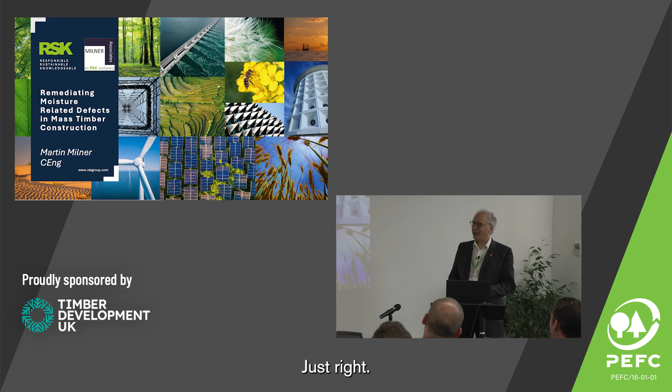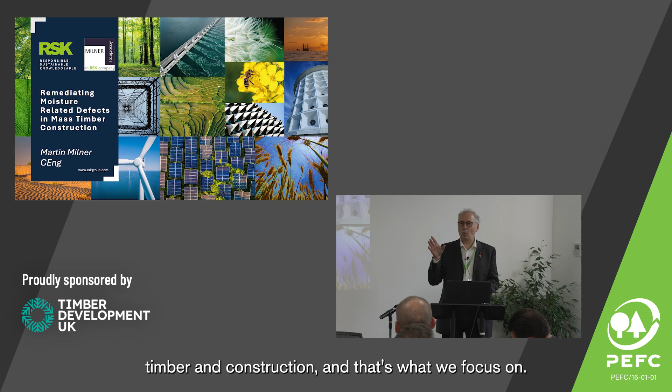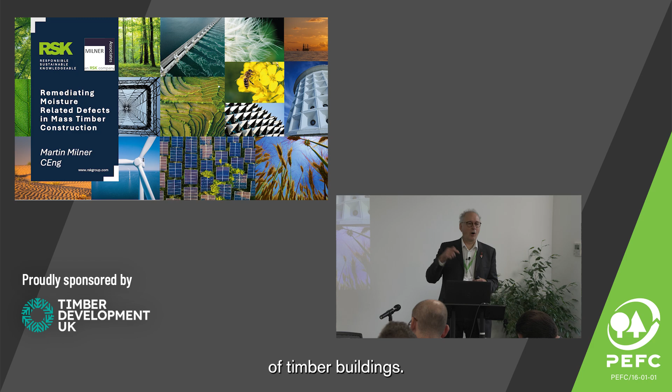Now, Milner Associates are part of the RSK Group, which is a large global environmental, soil and water consultancy, and I'm limited. Now, I mean that in the most modern sense. Sometimes they call it competence, but I like to go back to the old meaning of limited. I have limited knowledge about timber and construction, and that's what we focus on, and that's what we do within the RSK Group. And we also bring in, we've got a materials and science structures group, which has got some timber technology support for that. But where we sit is on the engineering side, looking at designs and remediation of timber buildings. Sadly, looking at remediation of timber buildings.

Now, timber construction is about knowing your structure. Now, unfortunately, I come across many situations where the term mass brings up different meanings. I don't know what's the matter with our industry. Most of you are in our industry. We can't help ourselves, can we? One minute it's timber, next it's lumber, bit of wood, or maybe board. We just mix and match. How do our customers or the insurance industry have a chance of understanding our terminology?

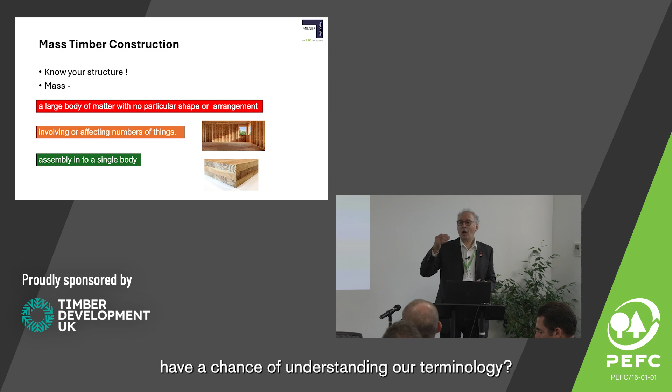I don't know why you call it mass timber, beyond me. So I looked it up in the dictionary. I thought, okay, that's architecture. I'll go with that. And that's a noun. That's what mass means as a noun. As an adjective, involving or affecting a number of things. And that's what I get in meetings, if we're talking about timber frame construction as opposed to CLT or glulam structures. They say there's a mass of timber in there. And what does that mean?

So I finally find something that resembles what I think our industry is trying to say. And it's a verb. Assemble into a single body. All that wood, lumber, timber, all coming together as one component. So I will take that as mass timber. But we do confuse our industry. Mass defects, or defects in mass timber.

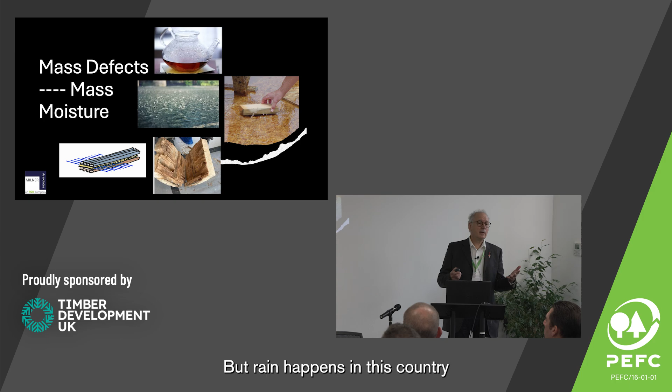We'll look at some of the root causes in my "Are you serious?" moment. But condensation is something that we don't think about. And it can be a problem. Condensation doesn't happen all the time, and you will get dry timber during the periods where condensation is not occurring. But rain happens in this country, and there are famous sayings, rain happens. And we've heard about the moisture highways going down the grain of timber. And with the different orientations of grain, you will get that different moisture highway in the product.

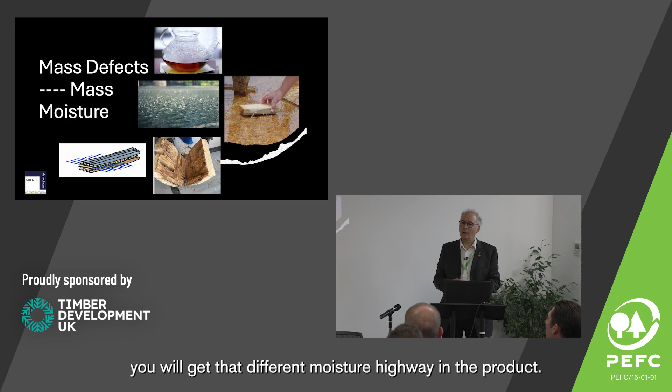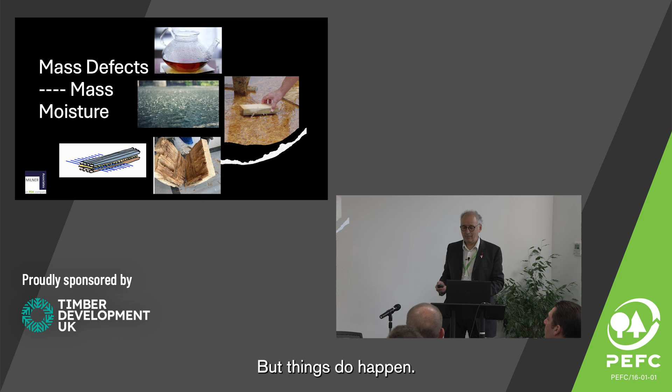So rather than, Paul's going to this afternoon talk about good practice detailing and avoiding the problems, I've got the awkward task of showing how to repair some of these problems. It's almost like I'm shutting the gate after the horse has bolted. But things do happen. So therefore, briefly in this 20 minutes, we can go through what it is. Now, I'm looking at it from a structural point of view. I'm not looking at it from the point of view of the source of that moisture. We will look at some of the things to talk about later. But where is this source? That needs to be removed first of all before you can do any repair, obviously.

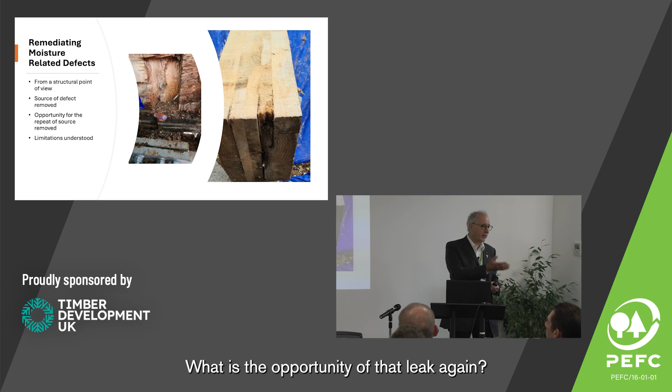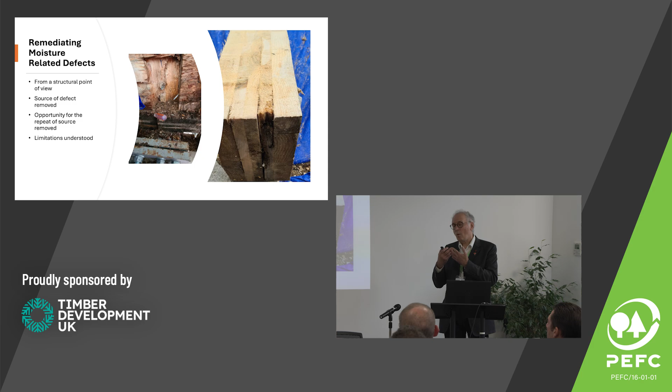But one of the things that upsets me is that if the architecture was wrong in the first place, or the building physics was wrong in the first place, you can't just repair it and put back what you had before. If you had a leak before, what is the opportunity of that leak again? Are you putting something back which is going to return in a couple of years' time to repair it again? Is that a sustainable repair? I don't think so. And it's the limitations of that repair too. What are those limitations? What are you actually doing in the repair? And what is being addressed?

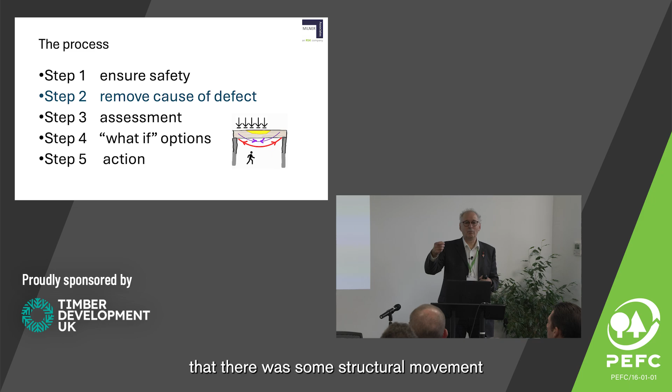We try to undertake it in 5 steps. The first thing, you arrive on site, or you're given the project to look at, or the case. The first thing you've got to consider is the safety, obviously. The safety of these buildings. Wouldn't it be an interesting point to ask all those that have done inspections on CLT buildings, all the structural engineers here, how many have gone to do that inspection on the basis that there was some structural movement or signs of it other than a spongy floor?

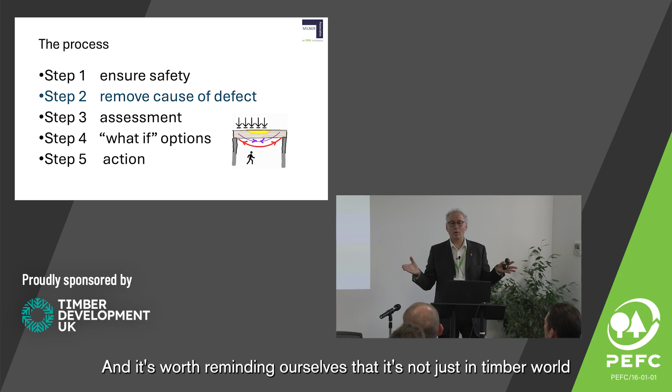Were there any actual signs of distress? Because I find that quite rare. And this might answer some of the questions about the school owners or the local authorities. They see no actual defect. It's not like a spalling concrete or something. And it's worth reminding ourselves that it's not just in timber world that we have issues. We have issues in steel world and concrete world. It's just that we're more focused on the timber.

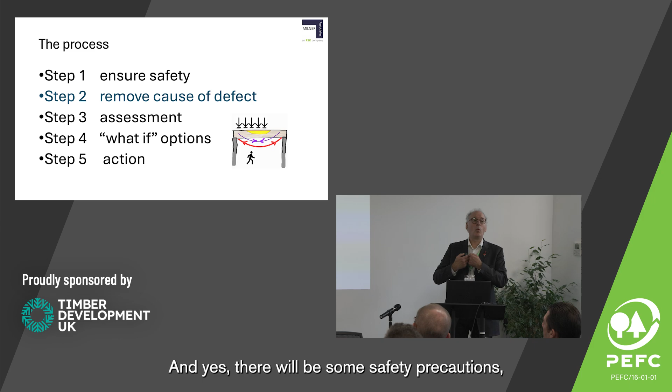Ensuring safety is the most important thing, obviously. Are the occupants going to be okay? And we'll look a bit later on about the residual strength of CLT and why perhaps we're not seeing these defects occur as something to be concerned about structurally initially. And yes, there will be some safety precautions, some acroprops or some higher level support systems. The first thing you have to do when you're looking at safety is make a judgment call as to what is required. Do you need to evacuate the building? Do you need to prop the building? Are people allowed in?

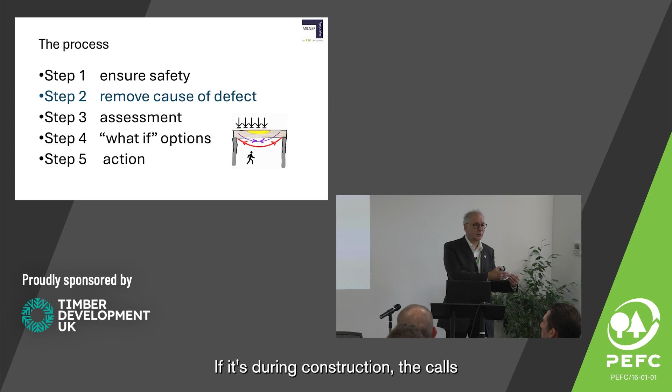Remove the cause of the defect. Obviously that's got to happen, hasn't it? So you need to know what the defect is first of all. There's no point doing a repair if it's going to repeat itself, etc. Remove that cause, whatever that may be. If it's during construction, check that it was during construction and it's not a condensation or a leak that's been fixed. So a bit of history review is needed to check through the process.

The next step is the assessment. What are you going to do for the repairs? Which brings you into step 4, the what if. What if you did this? What if you did that? And so on. And we'll look at those in a moment. And then the action to do the repair, and the appropriate follow-on trades to finish it off.

If I jump straight to the assessment side of it, first of all, what is the material that you're repairing? Now we've heard earlier that mass timber isn't just cross-laminated timber.

And as my wife says, no wonder it's cross with all those repairs you're doing.

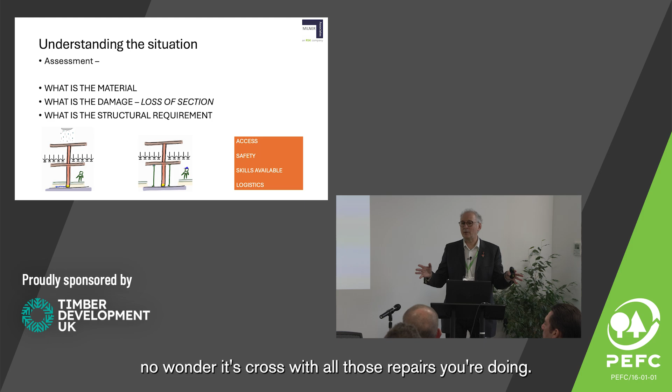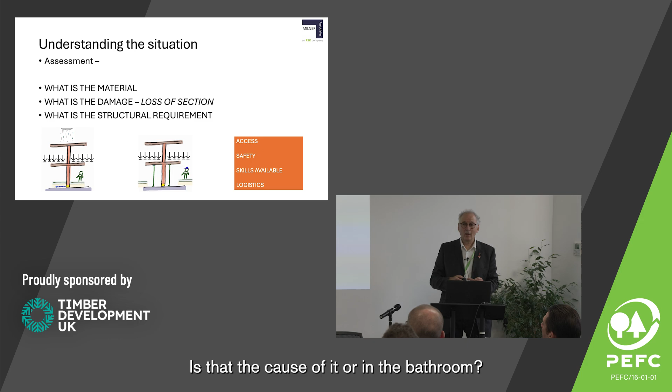What is the material? Are we looking at a board? Are we looking at a laminated veneer lumber? Are we looking at glulam? Each one needs a different approach. Is the sponginess of the roof or the floor because it's an OSB decking on the top over it? Is that the cause of it? Or in the bathroom? What is the damage, the loss of section? So full investigations by the various folks in the room here to identify the scope of this damage. There's no point repairing something if it's still got damage in it. Or is there?

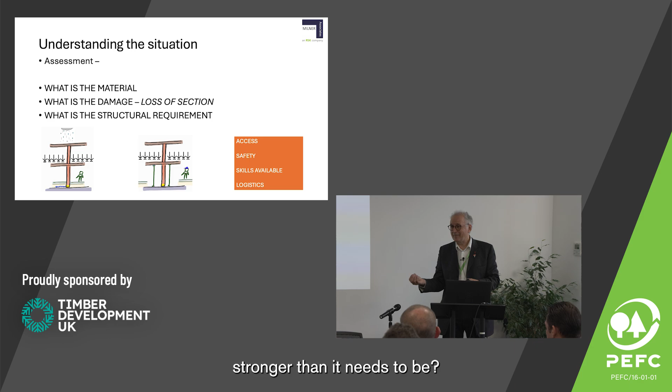Is it the fact that some of the structure is stronger than it needs to be? It was said earlier that maybe the cross-laminated timber or glulam solution is not the right solution for the project. May have been timber frame or a closed panel. So I always say to myself, hold on a minute, I've got joists at 600 centres and everyone's happy. Then I've got solid timber all the way across, i.e. joists at 0 centres. Is there a residual strength? Is there something we don't need?

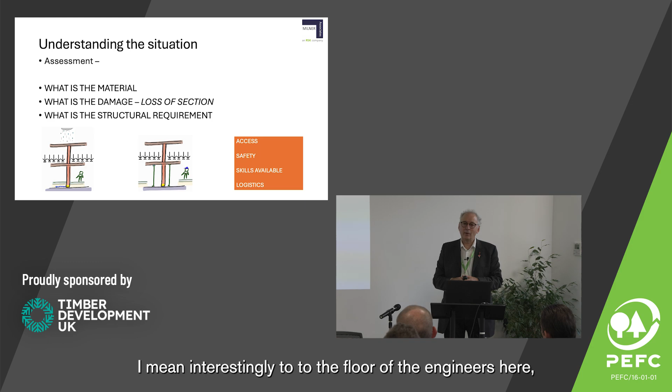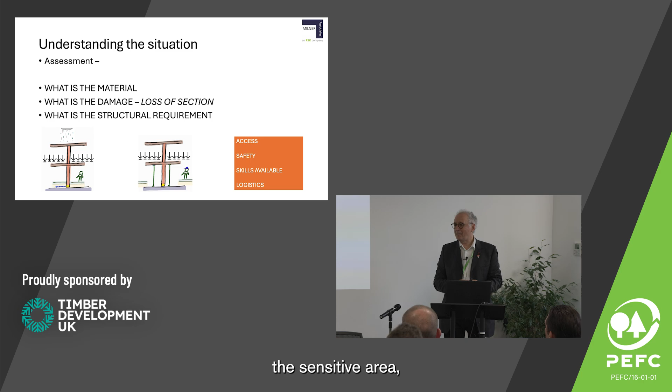Interestingly, to the floor, of the engineers here, how many actually design three-dimensionally in CLT, or is it single spans? Yeah, quite rarely in 3D. It's stronger than it needs to be quite often, particularly in wall structures. It may be needed for buckling or whatever, and maybe the defect is away from the sensitive area, which might answer why some of these structures stand up when they shouldn't. How many times have people seen a report that says 100% decayed, but it's still standing there? So what strength is there? And are you putting in support structures unnecessarily? These are the things to consider. What is the loss of section and what is the damage?

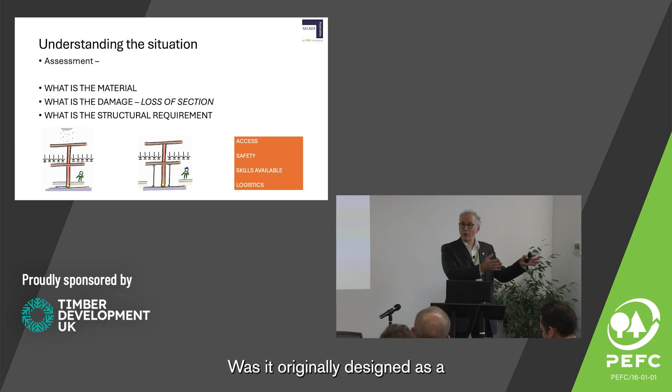Then you've got to ask yourself, what is the structural requirement? Was it originally designed as a terrace, but now it's just a flat roof? Was it originally designed to have parties or play football on, but now isn't, because they realised the vibration of people running up and down was not a good look? Or was it originally designed to be a green roof with soil and plants on top, in which case they decided the maintenance and cost of that was too much? The client now wants just a flat roof. So you've got the opportunity to say, what is the structural requirement? Do we need it?

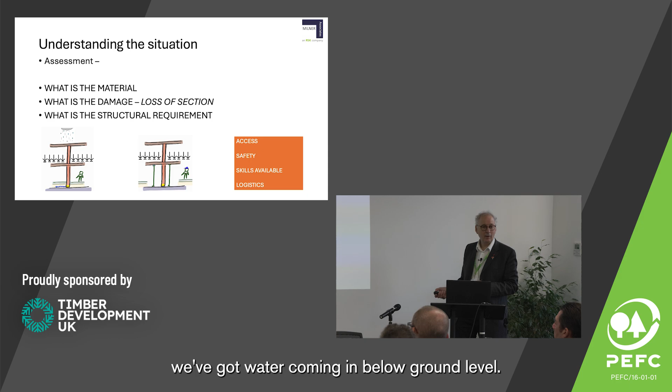And I've got 2 drawings down there. First of all, what is it? And then as soon as you identify a problem, in this instance, we've got water coming in below ground level. You can't see it. It's been identified. And immediately, you put your hard hat on.

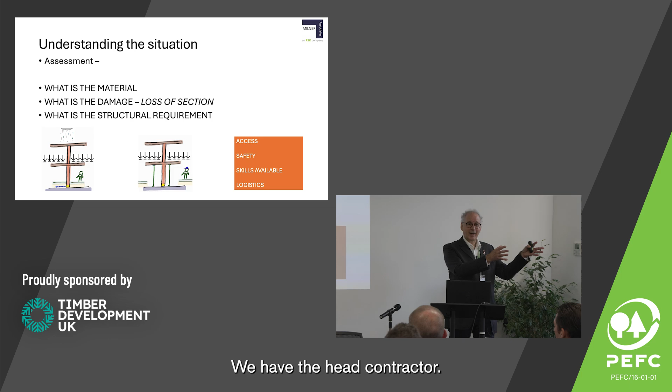We have the head contractor, then they subcontract to the other folks. And the other folks can be any sort of person available. So what are the skill base of those? That's the key. What is the skill base of the actual people doing the work? Because it's got to be tailor-made to them, otherwise it's going to be a continual mess.

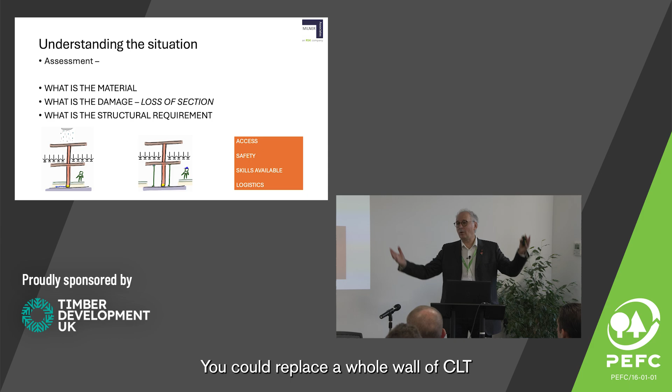The logistics. Yes, you could replace a whole wall of CLT, but how do you get it in there? How do you move it around? Etc., etc. It's a whole list of things you have to think about in the assessment process. As I said before, the remediation options are dependent on the wood product. If you've got thin planks, the chances are you're going to replace them totally. OSB board, you're going to want to replace that totally.

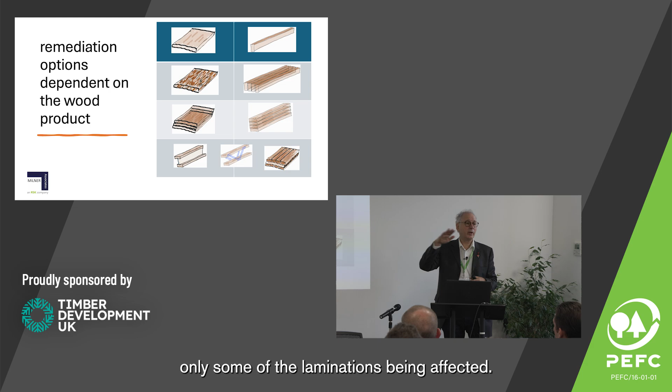Once you start to laminate, could be laminated OSB, could be laminated boards, could be in any format, then you've got a chance, as we've heard earlier, about only some of the laminations being affected. And if it's timber in various orientations, be it ultimately down to a cross-laminated product or a glulam product, then it's what laminations have been affected and where is it in the strength pattern of that beam. If it's all at one end, that's a different repair to if it's in the middle or if it's at a third point. And you've just got to consider the whole structural aspect.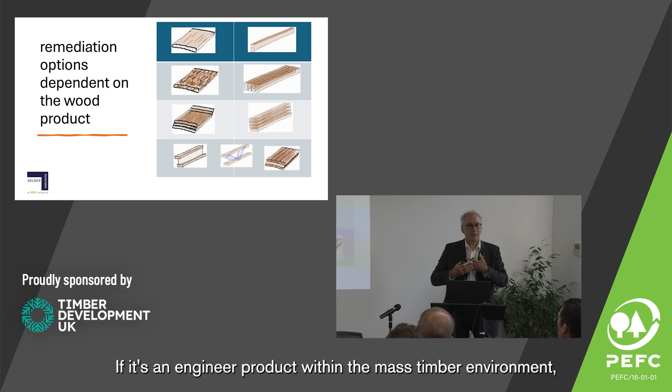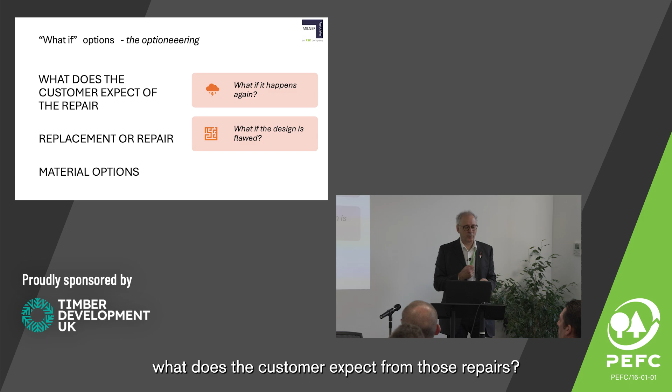If it's an engineered product within the mass timber environment, then those need different approaches to consideration of repairs. If it's a flange, you've got a chance. If it's the web, that gets very difficult very quickly. So the options, the what if. What does the customer expect from those repairs? Are they expecting this building to be put back as originally designed, or as originally they wanted the performance? They can be two different things.

It's amazing when you start talking to customers at the end of the job, well, I never wanted that, I wanted this. And while you're at it, can we have an opening there? And so on. So the repairs need a debate with the end customer. And maybe it's replacement. Is it a repair or is it replacement? In some instances, I want it demolished. I want this building out of my hair. I don't want it anymore. It's given me so much grief, just get rid of it.

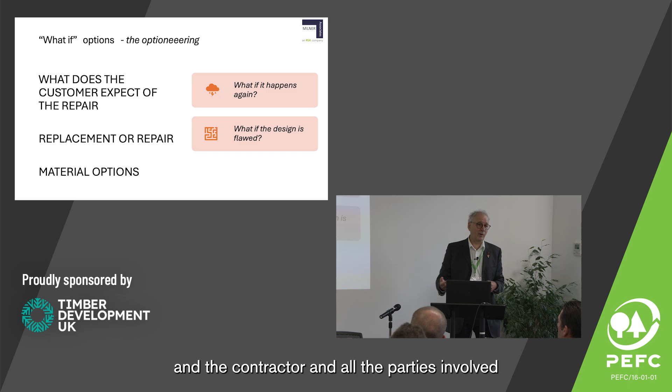Now that's not a decision we can make as engineers to look at repairs, but it's a cost-benefit analysis to be done. And the material options with what you do. And you have to address the fact, what if it happens again? So you're going to do all you can to get hold of the designer and the contractor and all the parties involved and find out what are the following trades. What are they going to put on top of this? What are they going to put underneath it?

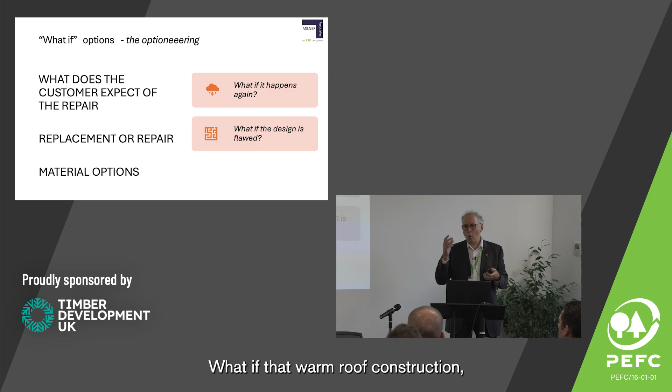Is it suddenly going to become a steam room? And have we got to redesign it in accordance with that? Where's the membrane? Where's the vapor control? Where's all these parts? Now, what if the original design was flawed? What if in that warm roof construction, the VCL was in the wrong location? What if in that warm roof construction that mass of timber, which is a good insulator in itself, is stopping the condensation going all the way up through? What if it's condensating on the underside of the dreaded single-ply membrane?

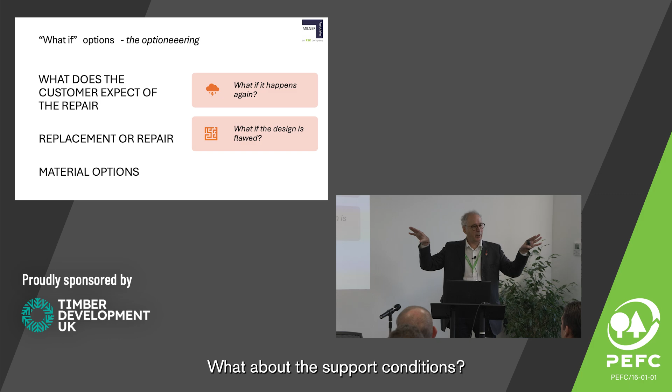Where is the condensation profile? What about at the support conditions? What about at those profiles? Has a full condensation risk analysis been carried out to see where the condensation points are at certain times of the year? That's what needs to be put down so that folks can understand where they're going with this.

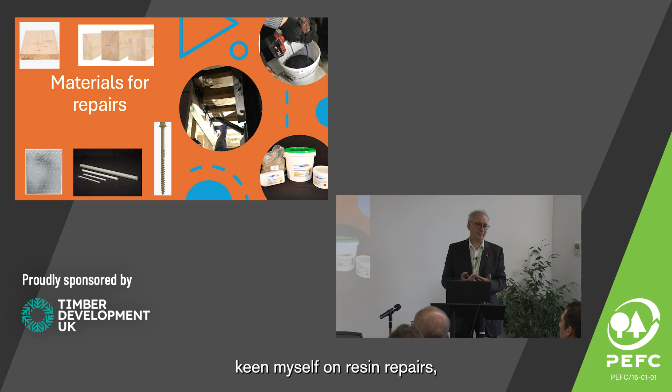So, materials for repairs. We've all got our own list of materials, we've all got our own toolboxes of what we like to use. It could be new timber materials coming in to the box, if you like. I'm quite keen myself on resin repairs. Worked with it for many years, and I find once it's properly designed for the end application, it works very well. But it could be putting in some dowels, steel dowels, connecting things together.

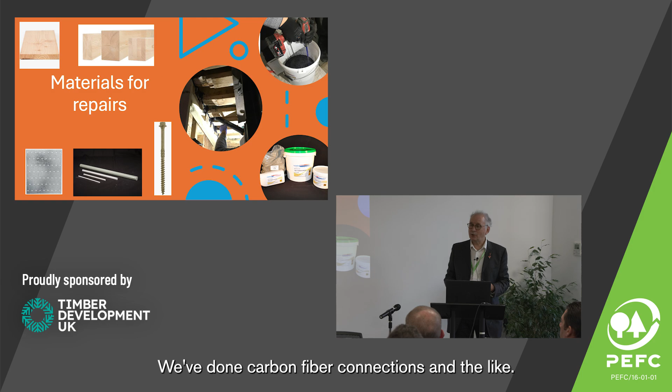It could be carbon fibre. We've done carbon fibre connections and the like. It could be steel plates to try and maintain the structural continuity of the item you're looking for. Here, that's actually resin repairing some I-joists. So, the action, the repair.

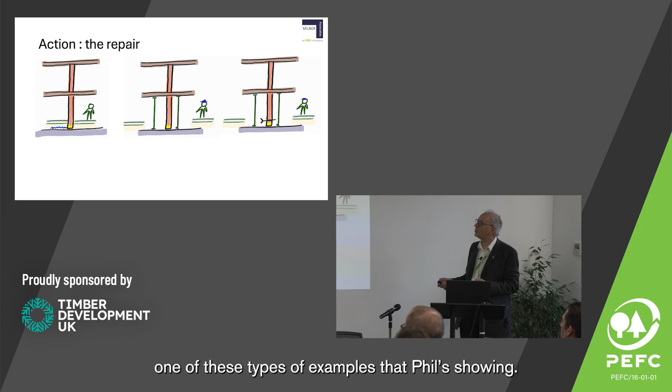Let's look at one of the types of examples that Phil was showing. You've got decay being identified with some form of water issue at the base of the wall. So you expose the base of the wall. You may want to prop it, you may not want to prop it, and we'll talk about that in a moment. Once you're happy, you can cut away the decayed section.

So let's have a look at that. This is a technique that we often use, and I know others do as well: you map out the profile of the decay. You know where the decay line is. You then treat it like underpinning. You do a small section, cut it out. There's one being cut out there.

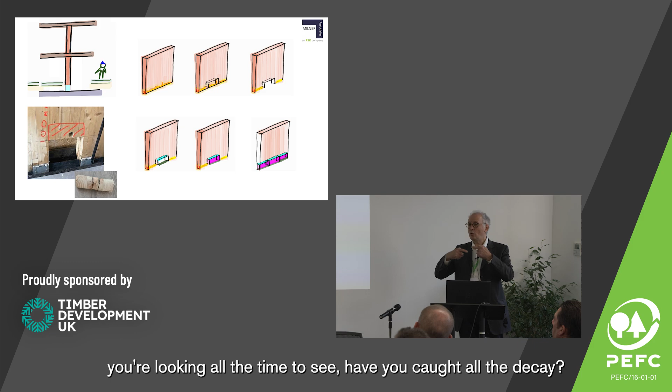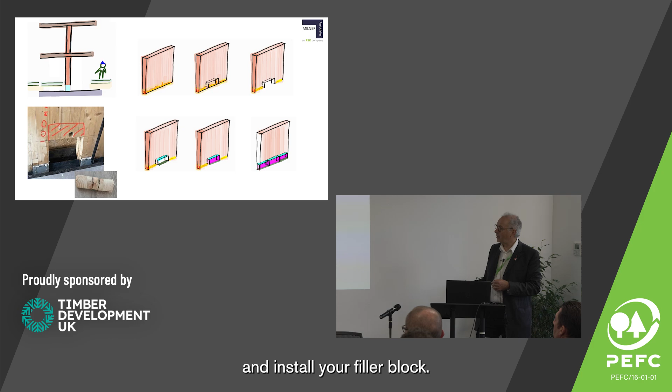You then treat the area that you need to prepare it and install your filler block. Now that could be timber going back in, a glulam, could be CLT, or it could be steelwork, depending on the final design and the criteria. If the original design is not flawed, then there's no reason why you can't put back CLT in that condition. And then you carry on along the length of the wall.

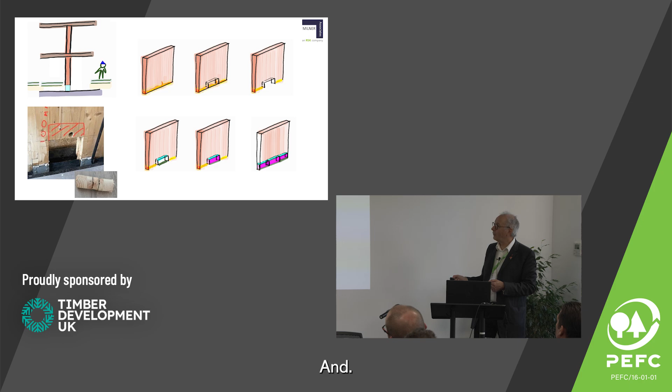And most times we do that without any temporary propping. Or we might need to support one floor, and we do it from one side, so you don't need to excavate both sides, or locally. And that's on the back face of one that's been repaired. So we didn't need to go in from this side, we went from the other side, and that's been repaired all the way along. Different heights because you've got different moisture profiles, decay profiles. And without propping, that particular one.

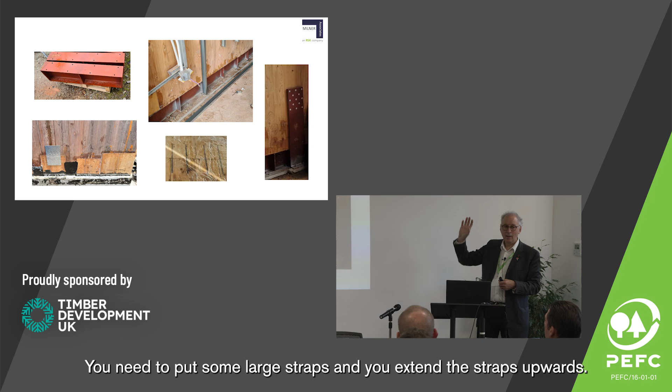If the design was flawed in the first place, then you're more likely to want to replace the CLT, the timber in that location, and in this instance, small lengths of steel used for that application. And sometimes you would need to increase the holding down, you need to put some large straps, and you extend the straps upwards, and you can replace them with higher levels.

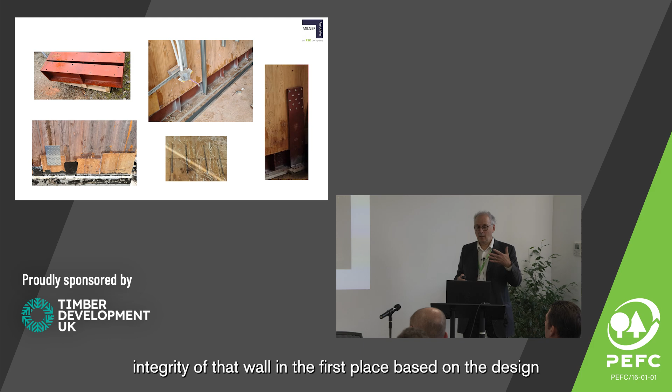You might want to use carbon rods in slots if you've got a particularly tall repair, because you're looking at the buckling and bending of that wall in that instance, so that you can maintain the original structural integrity of that wall, based on the design or whatever was being asked for. And it's necessary to connect the various parts together to maintain the shear resistance and the sliding resistance of the structure.

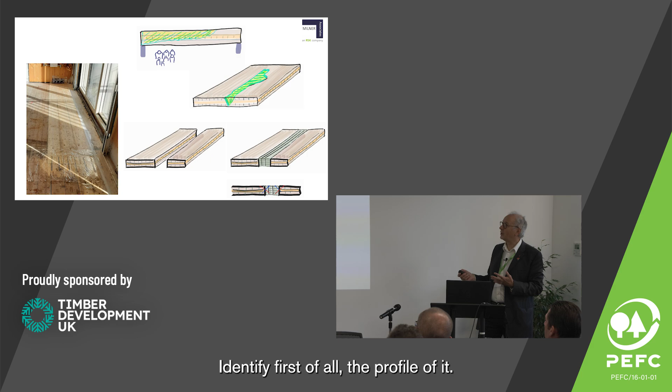Floors, roofs, similar pattern. Identify first of all the profile of the decay. Has it gone down a joint? Has it gone down a particular avenue? What is it? Most times in floors, if it's deep decay, it's gone through several lamellas. Often it will miss a lamella and it's on the next one below because of the grain orientation or the way the moisture's got into it. So you do need a full profile through the beam to identify where your decay is.

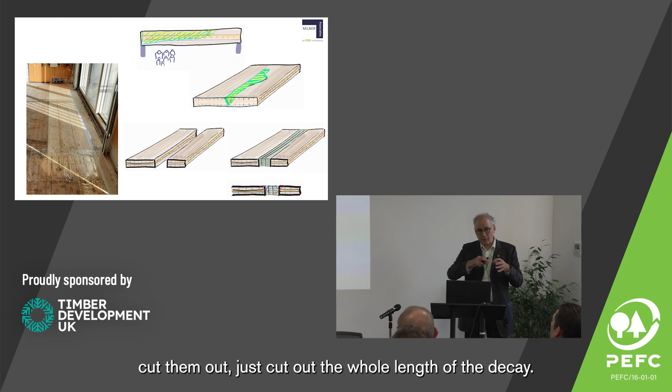And quite often we've simply cut them out. Just cut out the whole length of the decay, and then it's a straightforward process of reinstating either glulam back into that space or a CLT member back into that space, depending on the width of that slot.

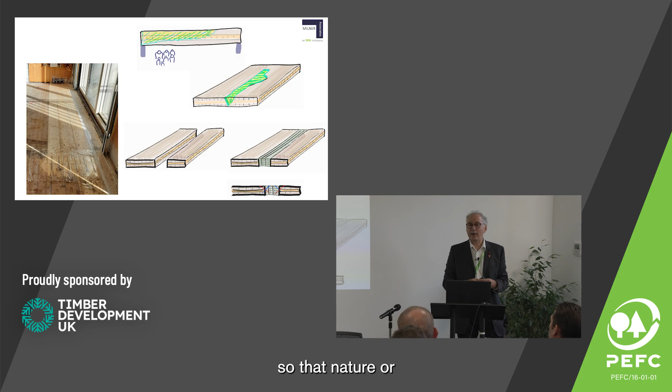You might want to bind them both together to ensure that they work compositely, so you're looking at some diagonal screw fixings of that nature, or you might want more of a clever half joint, but by and large we find that works perfectly well.

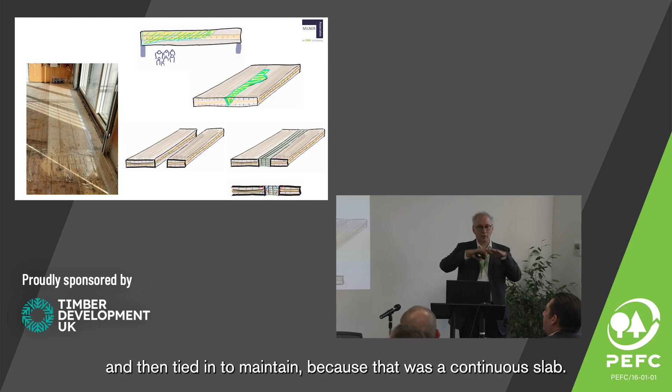I don't know if you can see there, that's a whole floor being replaced for the whole length there. And then tied in, because that was a continuous slab, you've got to maintain the structural bond between the two layers, the existing good CLT and the new. So that's fully achievable in that way.

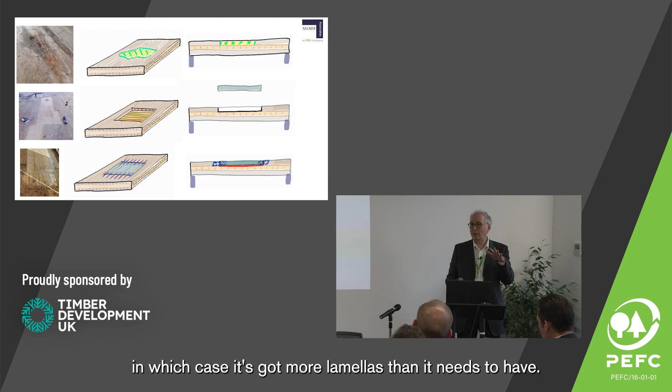Now we heard earlier that sometimes the decay is only local to the top surface or the top lamella, in which case it would be silly to cut it all out, all the good construction. It might be that the slab itself is okay. It might be designed for fire, in which case it's got more lamellas than it needs to have. It may be that you can simply remove the decayed area and fill it with plywood or another such material, if it's got no real structural performance needed.

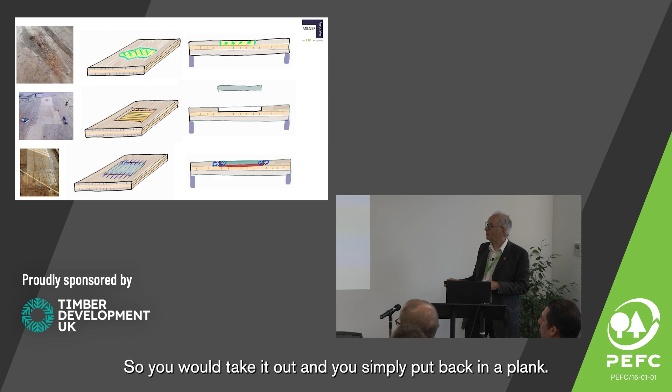However, if it's something that needs to be structural, then you're likely to want to take out a longer length. You will need longer lengths taken out beyond the local repair so you can bite in to good material or ensure that you've got a full bond on a repair. So you would take it out and you simply put back in a plank.

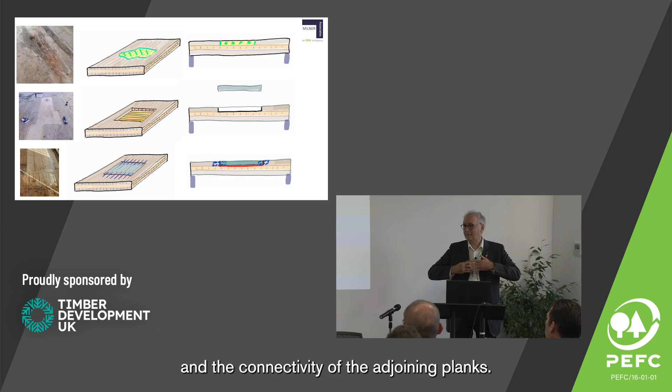The CLT would have been designed or built using graded lamellas, planks, and you can replace that, providing you get the right shear, the right bond across the interface and the connectivity of the adjoining planks. So you will need some finger jointing using carbon fibre plates or other processes, and that's when it starts structural and you've got various connections to consider.

So there are lots of techniques, lots of ways of looking at this, and no one size fits all. Every job needs to be assessed, what it is they want, what does the customer want, as we went through earlier on those aspects.

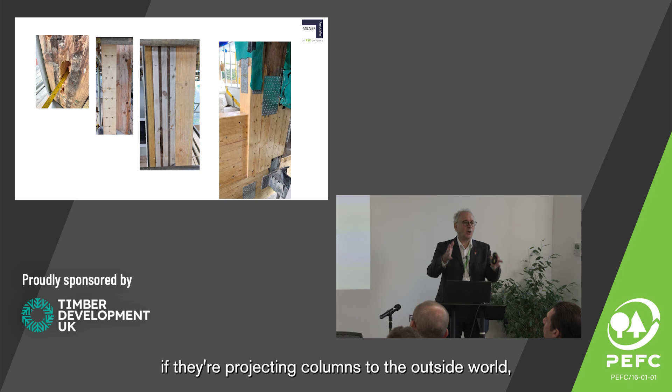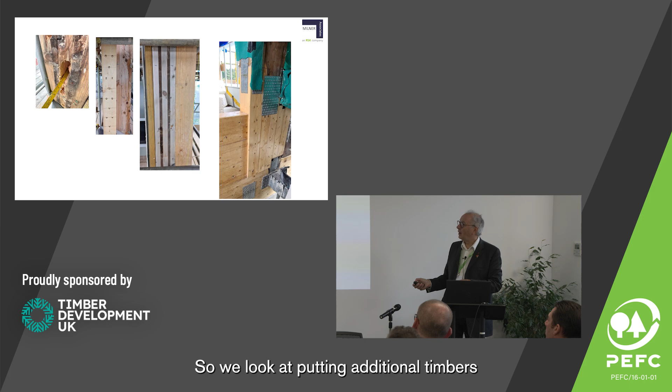CLT columns, it is a thing. We found sometimes, particularly at high level, if they're projecting columns to the outside world, they would have been protected by some form of cladding that hasn't been detailed correctly, so water's getting in behind it and being absorbed by some of the end grain lamellas. Then you've got decay in them. These can be very difficult for temporary works, so we look at putting additional timbers as a temporary measure to stiffen that area up, and those are structures secured to the defective member.

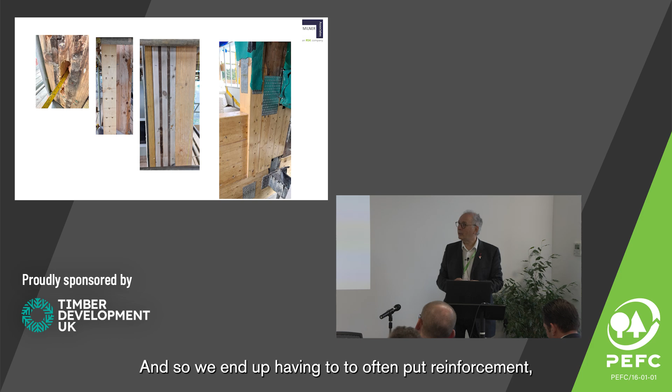More often than not, I've always found that decay happens right at mid-height where the worst stresses are for that particular column, and so we often end up having to put reinforcement in that before we do the repairs to get access to them. It's all about logistics. It may be that it's easier to cut it out and put a new column back in. It all depends on the scale of the decay and the conditions therein.

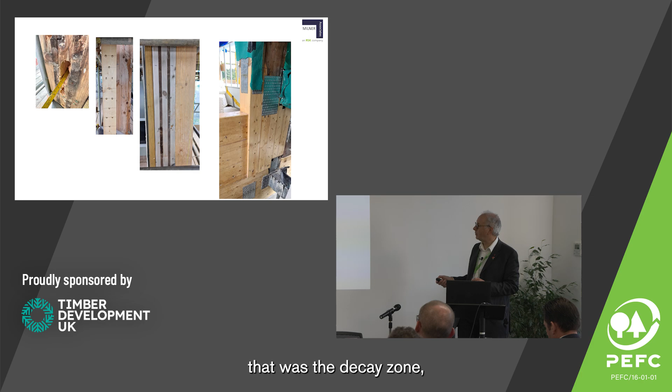Sometimes we've had to do complete new feet on the bottom of columns, CLT columns and connections and so on. And it all depends on the strength and stresses at those locations. These are all new, that's existing there, that was the decay zone, and it was necessary to put back the structural integrity of that location.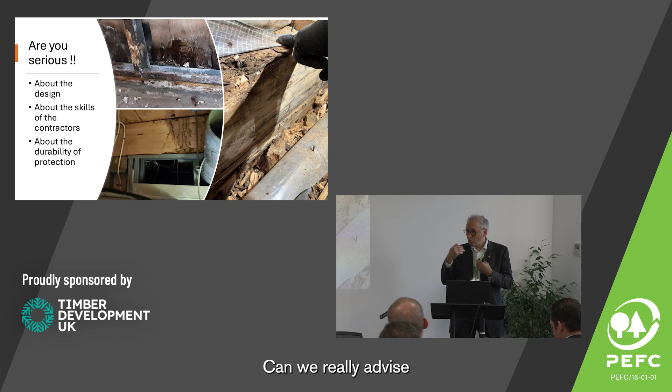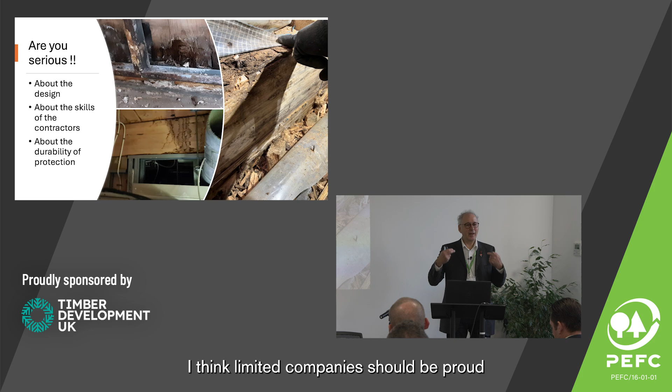So, the are you serious moment now. I mean, I could say to architects, apologies amongst you, are you serious doing that detail? What are you thinking? I could say to the industry, are we serious? Can we really advise the customer correctly? Are we serious about the skills of the contractors? I know there's quite a number of contractors in the audience, and I realise I'm signing my own death warrant now. But are we serious about the competence? Are you as limited as I am? I think limited companies should be proud and say, no, I can't do that, I'm limited.

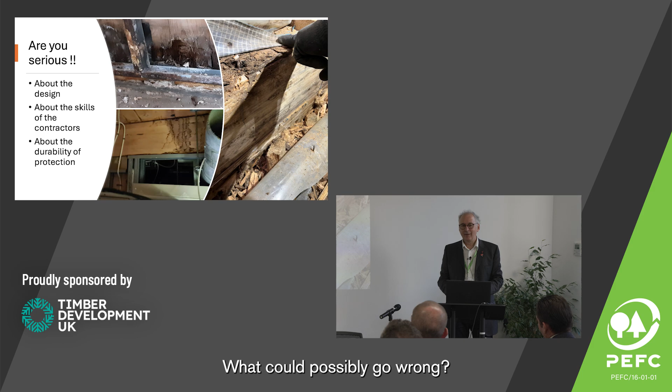And what is the durability of the protection levels being specified? I'm going to use that product because it's cost effective. And as long as it lasts 10 years, I'm out of here. Are you serious? Those are the sort of conversations I think you should have with customers. And identify what it is that could happen. What could possibly go wrong? Every design meeting should be, what could possibly go wrong? That's why I'm not invited to many.

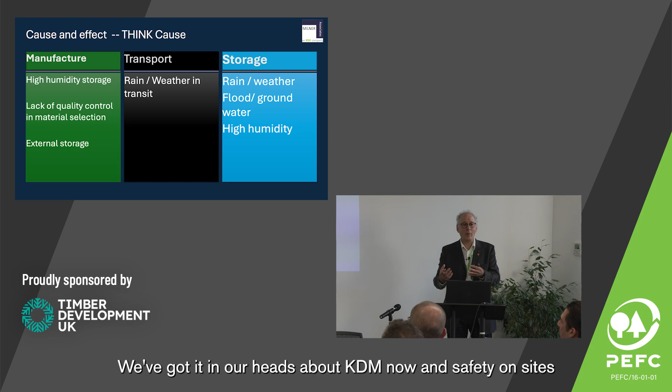Cause and effect. It's the thinking. Think, think, think. We've got it in our heads about CDM now and safety on sites. We're all on sites thinking safety all the time. We walk around now like some space-age person with all the gear on, and all the gloves and all the glasses and all the hats and all the coats and all the fluorescents. Yet we don't think properly about the buildings.

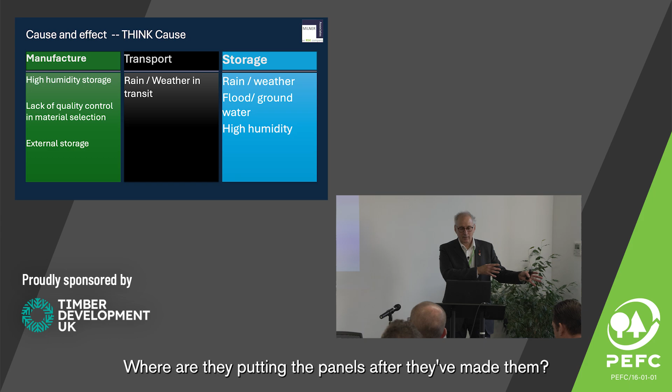In the manufacture. How is it being manufactured? Where is it being stored? Where are they putting the panels after they've made them? Where's the quality control sign-off? Has that been processed all the way through? Has the moisture content of those products been handed over to the next person, like a relay race?

External storage, big problem. Transport. Driving rain. Or trapped snow. Storage on site. Flood. Groundwater. Is it being thrown in the puddle? I know no one does that anymore, apart from most of the sites I see. But

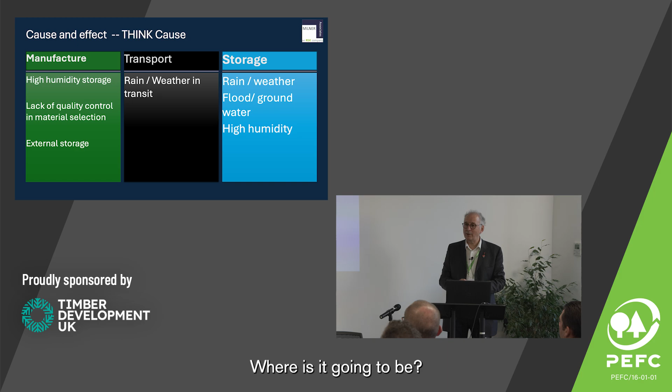has the site got high humidity? What do I mean by high humidity? Is it the winter time? Have we got a winter kit as opposed to a summer kit? We've got to think these things through. What is the storage on site? Where is it going to be? Is the storage on site at floor level before?

And what if there's a delay? Has the program and the logistics gone mad and said, I want to do a complete horizontal run? I'm not going to go vertically, I'm going to go horizontal. Is that a good idea? Sometimes it is. But sometimes it isn't.

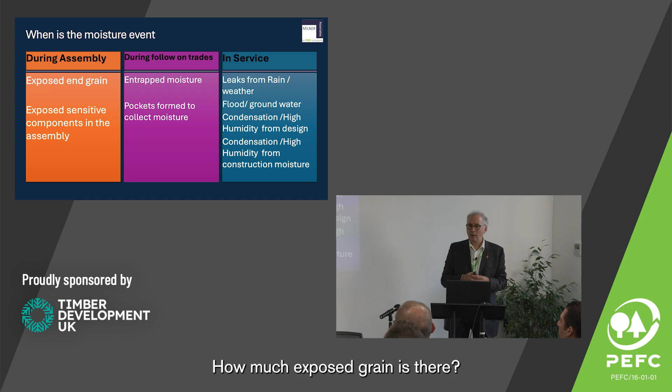During assembly, how much exposed grain is there? How many times have I seen glulam columns put in concrete pockets? And in a lot of the world, a concrete pocket's called a swimming pool. So if you said, I'm going to put a glulam beam in a swimming pool, would you do that? No, you wouldn't. So there's not a lot of difference in construction between that pocket and a swimming pool.

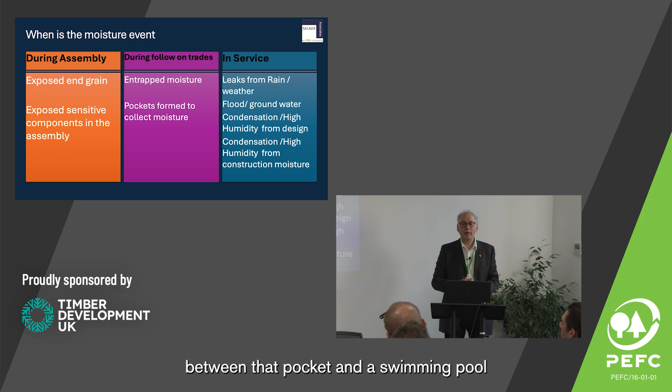Exposed end grain. Where is the sensitivity of the components? Which needs better care? And some of the new detailing coming through now is fantastic, with proper steel plinths, steel post supports and so on. Now during the assembly process, yes, it will rain. Yes, some of your tapes will come off. Yes, some of the water will get in. So it just needs to be addressed, QA'd, and it can be done properly and appropriately.

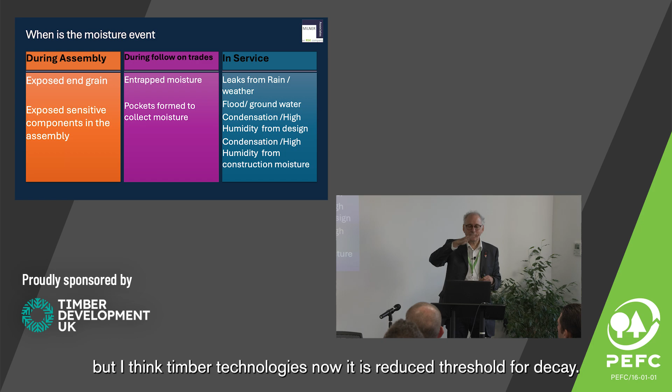But if you entrap that moisture, yes, it might dry out, and you might never hear about it again. But if I've got my science right about timber, it's got a great memory. Engineers know it as creep and deformation over time. But I think timber technologists know it as a reduced threshold for decay.

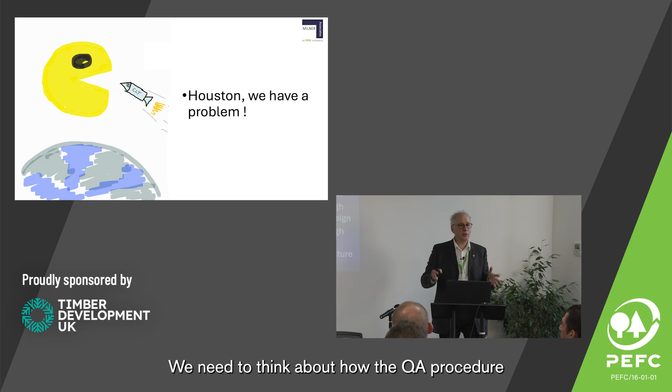Also, you get a situation where if you've got a bit of moisture in there and you've got some condensation coming up, it adds to it. And it generates itself, gets its own little microclimate going. And so, entrapped moisture is a problem. We need to think about the QA procedure of the handover process. Check the pockets, check the joints, check the interfaces where the steel comes to the timber.

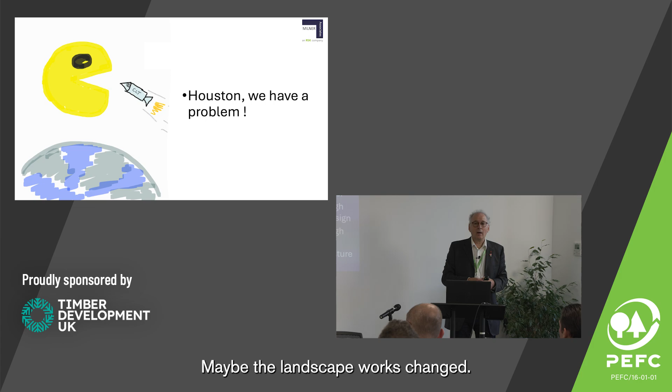In service, yes, leaks from rain and weather, an obvious one. Floods, maybe not so obvious. Maybe ground level's changed. Maybe the landscape works changed. Maybe the landscape works now are 300 mil above internal floor level when they used to be, in the design process, 150 below. Is there some change in the way that the building's used?

In-service checks, think about where that moisture could come from. And this should all be discussed at the design team meetings in the very early stages, so everyone's got full knowledge, eyes wide open, of what's going to happen.

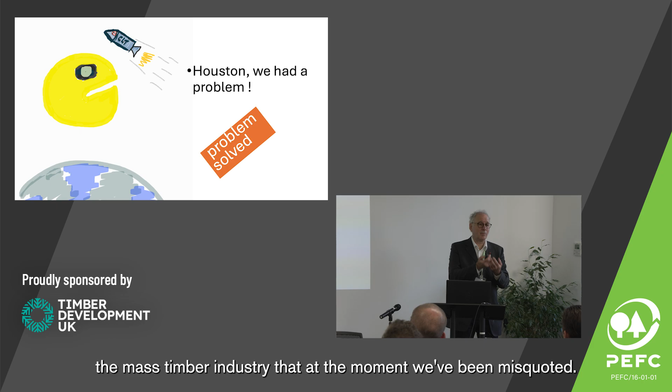So maybe, I started off thinking, have we got a problem? And if anyone actually looks up this phrase, they will find out it's actually misquoted. And that's where I think the CLT industry, the mass timber industry, is at the moment. We've been misquoted. Yes, we did have a problem, but the real quote is, Houston, we had a problem.

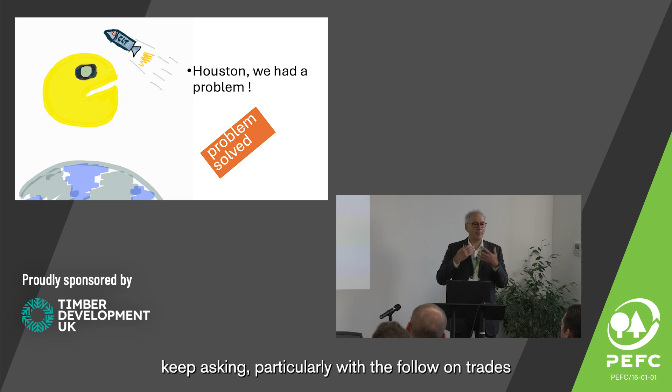And we can solve this now, and we can build it back up. And we are learning, and we have learnt. And I'm seeing better designs come through, and better consideration. But we've got to keep going forward, got to keep asking, particularly with the follow-on trades and the different products and the balance of that. So I hope, there's this little smiley person in there, and I think that's what we're going to be.